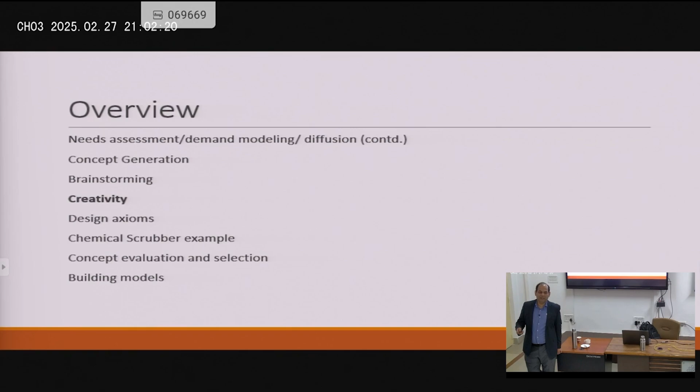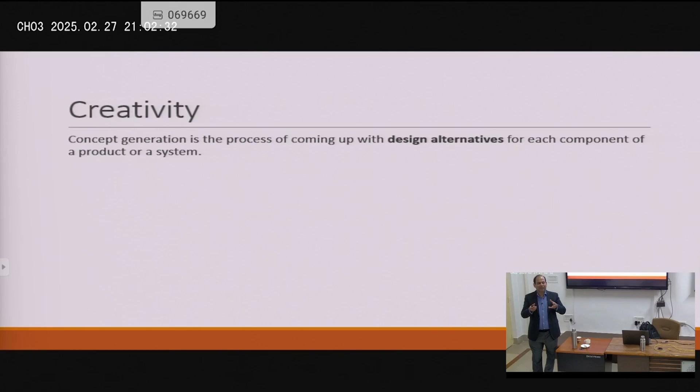So all of us have examples of creative design in engineering. I was giving the door latch or the doorknob assembly earlier. Creativity was going from a much more complex design to a simplistic design that works exactly the same. There's really no difference once it's assembled, except that design-wise, there's a lot of difference.

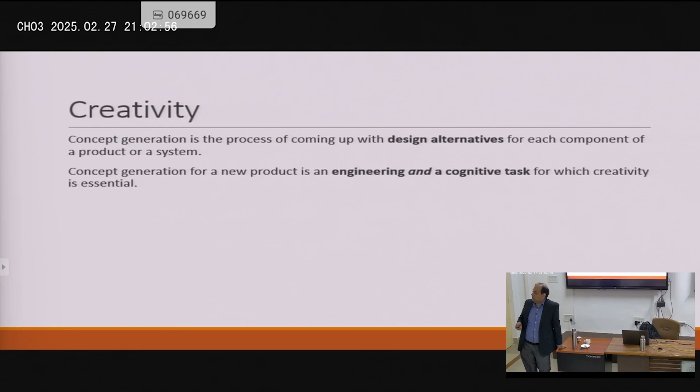So concept generation is coming up with design alternatives. Concept generation is a task where creativity becomes essential. It's an abstract concept, so it relates to the ability to come up with substantially new ideas or solutions. And we can actually effect fundamental changes in a product or a system if we are ready to be creative. So many solutions have gone from, I'm sure you've seen the evolution of some of the rocket engines over time, and then you see we simplify things, we come up with new solutions and so on and so forth.

So people will say some people are creative and some people are not. And we've found that creativity is not innate, it can be learned. So people can actually, over time, develop the ability to come up with creative solutions.

Anybody work with genetic algorithms here in optimization? So one of the ways, simplistically, even later in the lectures I'll talk about genetic algorithms in a little more detail, but one of the ways it works is it mixes and matches part solutions or solutions to sub-problems in many different ways. And when it does that, it's able to come up with new novel solutions itself, just like we do in nature. In reproduction, the genetics combine, and then we have newer and newer individuals that are over time evolved to have better and better traits.

So if you think of flying, that's a pretty complex activity that some animals and insects are able to do. If you go back to the evolutionary process, scientists say that flying has been invented by nature multiple different times using different pathways. It means that this solution can be found over and over again using this idea of mixing and matching.

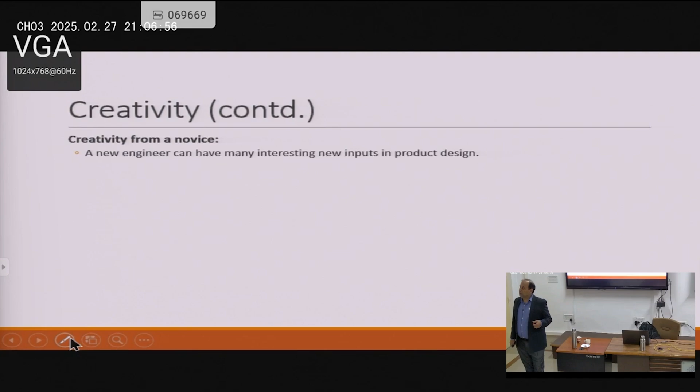So a new engineer has a lot of interesting new ideas. You come to an engineer in the field, a lot of you, if you go to industry, will see: oh, why don't they do it like this? Why don't they do it like that? Oh, I have an idea for doing this. And many times: oh, that doesn't work. Oh, that's dangerous. So those kinds of things can happen.

And it's a double-edged sword. So not having enough experience, everybody can still hear me right, sometimes helps you in coming up with new ideas because you're not constrained. You don't think about, you're not, so we say, jaded by your experience.

One example that comes to mind always when it comes to this is, I don't know if you've heard of the movie Citizen Kane.

Citizen Kane was a movie made in 1941, directed by Orson Welles. He was, if I remember correctly, 24 years old. That was his first movie. And even now, it's considered the best movie ever made.

When he was interviewed, they asked him, how were you able to make this movie that is considered one of the best movies ever made when you were 24? And he said ignorance. There's no confidence to match it. If you don't know much about something, there's nothing holding you back. You start questioning, and that's why he was able to do so many interesting things with the movie. Obviously, it's one of my favorite movies, so if you get a chance, definitely watch it.

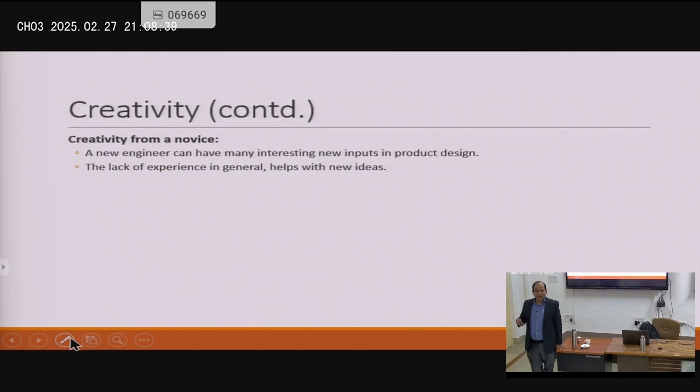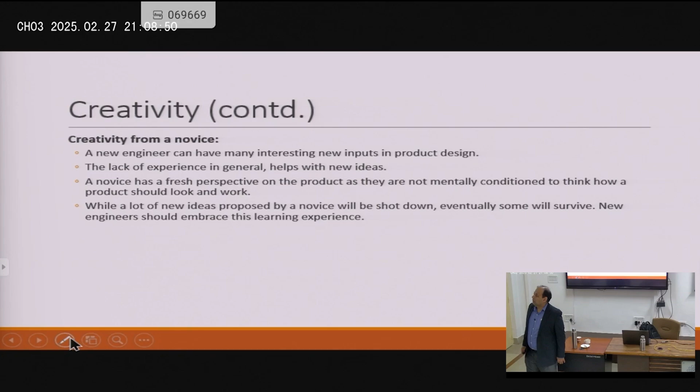So there's creativity from a novice, right? When it works, it's amazing. And when it doesn't work, of course it's disappointing, but we should take it as a learning experience. You should not think, okay, I had a bad idea, now what? You should say, okay, I'm expected to have bad ideas now because I don't understand the entire working of the system. And the more complex the system gets, the more of these ideas you will have, because even if you thought of the subsystem, you may not have thought of all the different interdependencies with different subsystems.

So you might make a change here thinking that I improve this subsystem, but I may have made something else worse, right? So there's an example, I won't get into much detail, where they were just changing a structural element in a plane, and they were able to reduce, either with new materials or new design, part of the plane.

They reduced the weight of it, right? And in aerospace, weight is everything. Every pound saves you 5 pounds, as they say, because reducing weight, you don't have to carry the fuel to carry that weight. Everything goes smooth after that. So you would think that anybody that can take a structural element and reduce the weight without compromising strength is a great thing.

Except it's not always a great thing, I should say, because in that particular case, the location of the center of mass or center of gravity of a plane should be in front of the aerodynamic center. That's not a trivial thing. You change it, now the flight control software, everything has to change. The entire plane starts acting differently. Going back to our 737 example, those are the kind of things that happen.

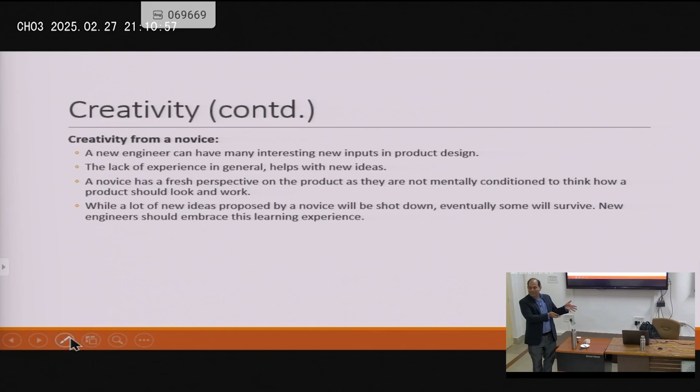Even if you made the plane lighter, you change the weight distribution, you change the location of the CG of the plane. Now the plane handles differently. Every control input that you have has to be modified based on the fact that the plane has different stability characteristics. So you would think, oh, I made this lighter and I made this better, but you caused system-level issues. There were other issues too, I think the natural frequencies and all those things changed, so it led to cascading system-level changes, which you wouldn't think, but you should embrace that idea.

So the idea is not to say, okay, we should not make planes lighter. That's not what we're saying. We should make planes lighter only when we understand the system enough, and involve the decision makers in other subsystems, so any change that you make can be accommodated. So if those people knew about the change you're making, they can change the flight control software, they can make other changes to the plane and go from there.

So new engineers should embrace this experience, don't get disheartened. But also be careful, don't start implementing ideas without telling people. So, oh, I made it cheaper, now I'm going to implement it - no, discuss it. Discussing with experienced colleagues is important.

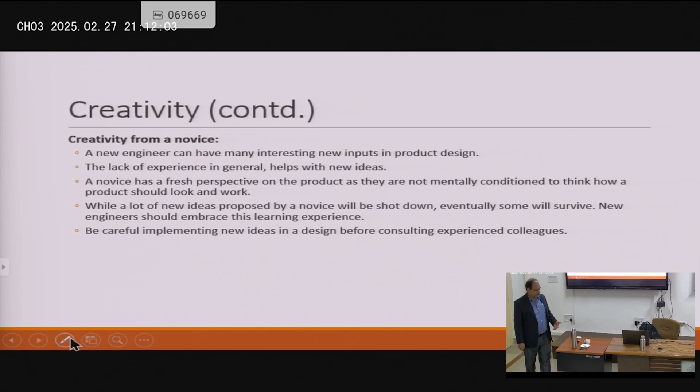Is there any correlation between creativity and design thinking? Well, design thinking is, creativity is a sub-part of that, right? So creativity helps you come up with better and improved designs. But again, we should embrace it, but I don't know if we can necessarily measure it. Creativity is an abstract concept that should be encouraged, thinking outside the box, as they say.

As a novice engineer, you should embrace the idea in your designs. And as an expert, that's the next point we have here - you have a different look to creativity because you're creating on top of your already good understanding of the design. So those creative steps have immediate benefits because they are already at the boundary of what's considered a good design, so any improvement you make quickly shows. In the case of a novice, their design thinking is let's change things and see what happens, versus we know that changing this in this way will make things better.

So like I said, experts are better at suggesting incremental changes. They can figure out that if you tweak this, it's going to get better. An example comes from...

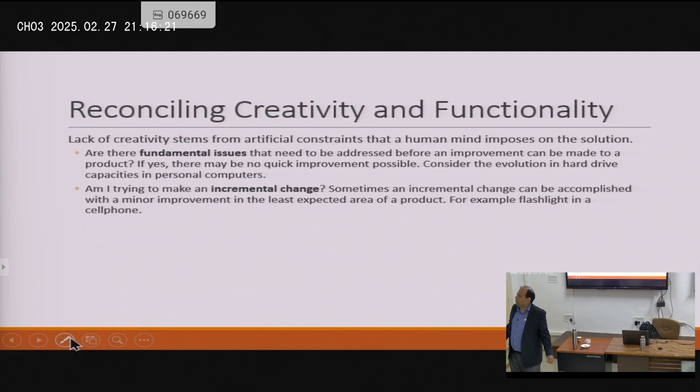If there are fundamental problems, then systematic solutions are the only ones that are going to work. For example, you could try an incremental change instead — you can improve a product, and there are millions of examples of this, where you think of improving it and ask, why don't we just do this?

Long time ago, people would use flashlights, the screen light, to see things in a dark room. So why don't we just add a flashlight, and then things were easier, right?

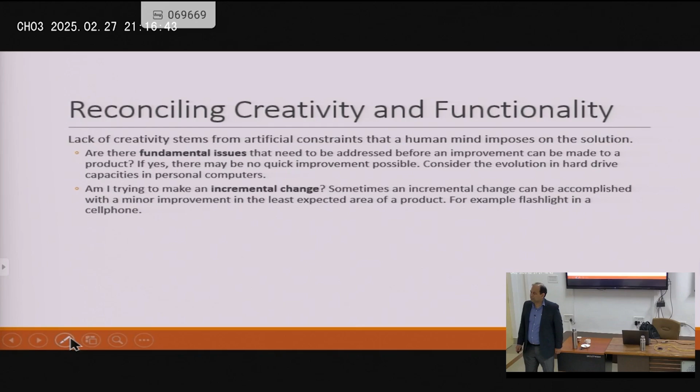Ask yourself if you understand the functioning of the product enough. Going back to our discussion of novice engineers not understanding the working of the system enough — in the scrubber example we'll cover later, I might think I can install a lighter motor here and it'll work.

Well, no, you don't quite understand — the objective is not just to pump water, but also to create enough pressure to accomplish a second task. If you don't understand the working of a product enough, you might run into these kinds of situations.

This was a real problem we had. We had space constraints, so we thought we'd just put a small motor there, but of course it wouldn't accomplish the purpose. Many times manufacturers would say don't repair your products, it'll void the warranty, because you might think you're making a change, but you're actually making it worse or more dangerous. So they say, don't repair products.

Many solutions are a result of somebody backtracking to the essential function. Sometimes we get anchored to a given architecture, a given product - this is the product we have, and we can change this. Go back to the original purpose. We have all these examples of slide rules versus calculators. The original purpose of the product was this. Why am I doing this? Let's think of a better way.

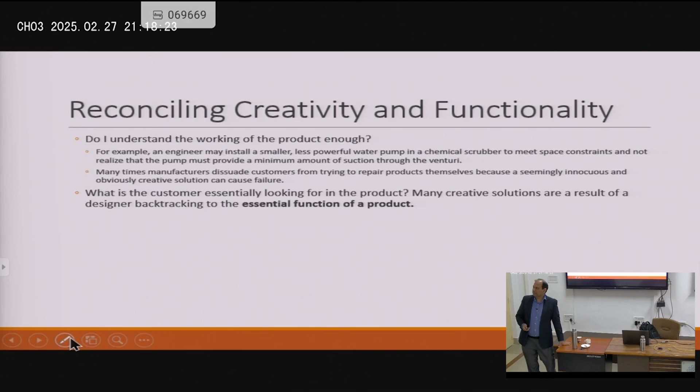A related thing from the whole genre of creative design and concept generation is axiomatic design. All of these are research areas in their own right - people have done a lot of work in these areas. I'm just trying to introduce you to some of these concepts that when you're doing concept generation, conceptual design, you should think about. These are guiding principles that you can use.

So we talk about creativity - it's a guiding principle. We cannot really come up with a theory, a mathematical theory of creativity. That's not going to happen anytime soon anyway. So another thing is axiomatic design, right?

So each product and each design is different. If each product and each design is different, then what similarities exist? We can never study product design, we can never study systems design, right? So if we go back to our first lecture, I kept saying: develop domain independent skills, skills that are domain independent that you can apply to the design of a water bottle. You can apply it to the design of a personal computer.

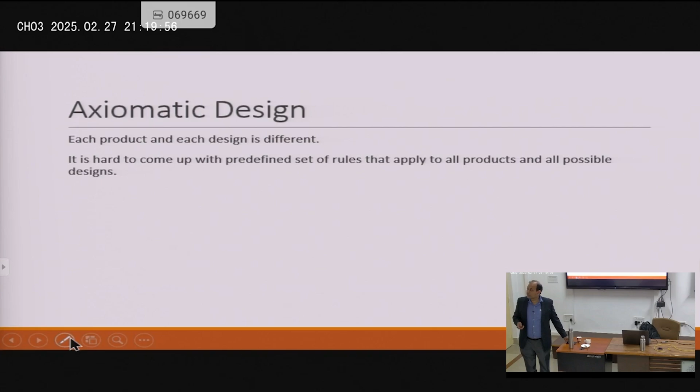And that's what domain independent knowledge is, and that's where this whole idea of axiomatic design falls. Like I said, it's not something we can have a mathematical theory for, but definitely it serves as a guiding principle. So the first one is: maintain the independence of functional requirements. Functional requirements should generally be addressed independently of each other, and minimize the information content of the design. Information content of a design roughly translates into how much information is required to completely manufacture a product, and this should be minimized.

Can one of you try to elaborate on these? First one, maintain the independence of functional requirements. Remember when we talk about customer needs being addressed by functional requirements from the product - functional requirements are features of the product or system that help us address customer needs. This one's saying keep them independent. So each functional need should be addressed by a different functional requirement - we're not talking about customer needs, those are already mapped to functional requirements. We're talking about functional requirements themselves: one functional requirement should be addressed as much as possible independently of the other functional requirement.

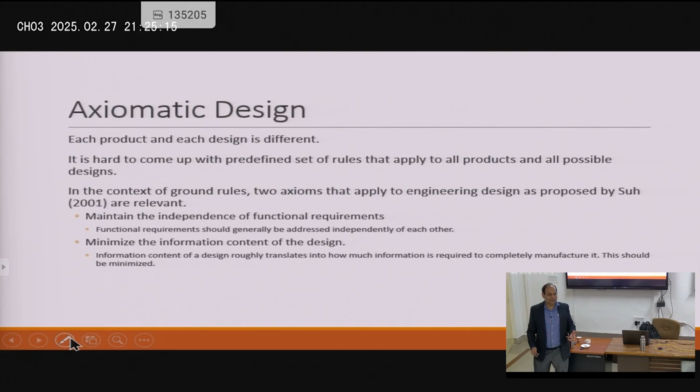Another example to further exacerbate the violation of this rule would be space. Those are one-off things, right? You try to integrate as many things as possible because you can spend millions of dollars making it more reliable, and then you don't have your weight constraints.

Would you give a few examples in which it maintains the independence of functional requirements? A personal computer. Right, so basically you have a power supply. You can take out the power supply from this company, add another power supply. You take the motherboard out, leave everything intact, make the connections with the other motherboard, it'll work. Take the hard drive, add a different hard drive. People do it all the time, right? So it's a modular product. The storage is completely independently done from the power supply, which is completely independently done from this.

We strive for it. In certain domains, we cannot do it, or we shouldn't do it, which is aerospace, a striking example of that.

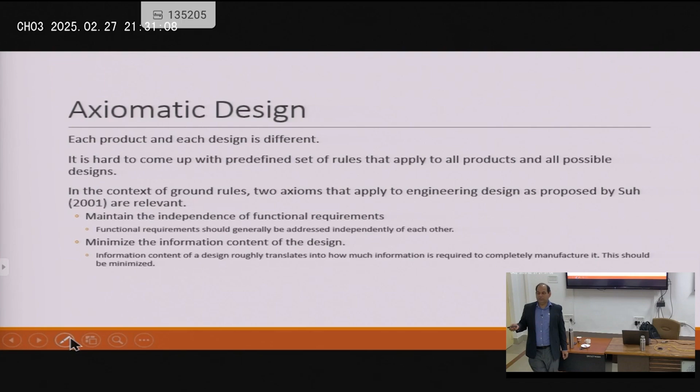So earlier I said minor weight changes the CG, bad things happen. Here, plane has 200 tons, a plane that cannot land because most planes are too heavy - their weight saving is everything. So their landing gear and structurally they're not strong enough to land. They have to first burn the fuel, get light, and they can land. Or if they land right away because of an emergency, they throw away the fuel to get lighter so they can land.

But the fuel is distributed such that as it burns, it does not change, or changes predictably, the CG of the plane. Most of it is in the wings and all that. So you make sure those things don't happen. Even in that case, you minimized the system effects by making it independent of that. So sometimes it takes some extra engineering, but it can happen.

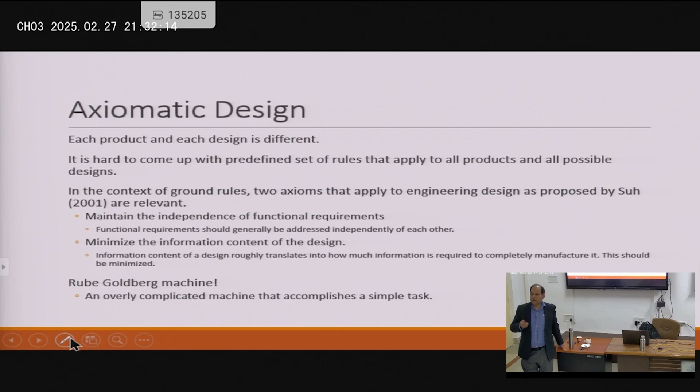And the next one is minimize the information content of a design. That should be pretty obvious. But have you seen or heard about the Rube Goldberg machine? Somebody is sitting down to eat breakfast, and they press a button, and then the ball rolls down and hits something else, which triggers something else, and then opens the valve, and then that starts the stove, and something starts cooking, and then the robot picks it up and slides it. Really complex way of doing something very simple, right? I'm sure you've seen those ads and things like that.

So the idea there is that's the opposite of what we should be doing in engineering. We should be making designs as simple as possible in terms of information content. People will say that you can do it, but for a general product, you really cannot come up with a hard and fast rule, but you should say keep it simple. Occam's razor - keep it simple, minimize number of parts, minimize number of things.

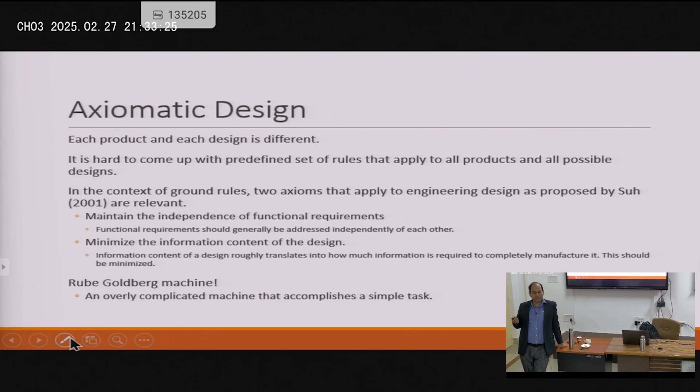In my systems engineering class, when I teach it full semester, I also teach design for manufacture. If you read any of the books by Boothroyd on design for manufacture, he says minimize part count, minimize part count. He talks all the time about minimize part count. For example, he'll say, okay, I have two things that need to be joined - screws, I join it with screws. He says, okay, how about plastic snaps? Just snap it into place. Guess what - if I don't have a part, if I can eliminate parts, I don't have to make it.

I don't have to order it. I don't have to receive it. I don't have to store it. Nothing has to be done if a part does not exist. So minimize information content is generalizing that concept of reducing part count. It's keep it simple, don't have weird shapes. Like somebody says, okay, how about this nice curve? But who's going to manufacture it? It increases manufacturing costs.

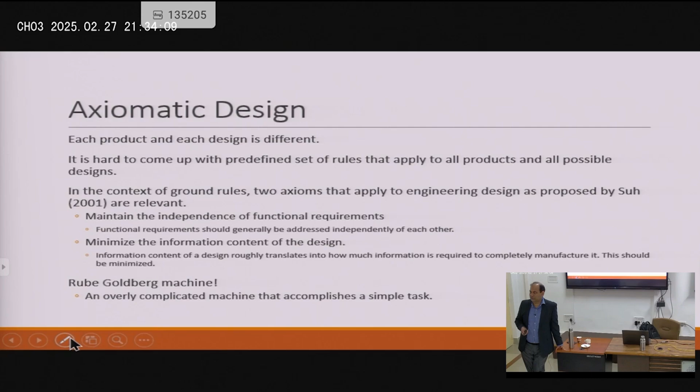I had the whole slide on that, but either way, we've talked about these points: functional requirements address intent and behavior during operation, and many functional requirements are possible.

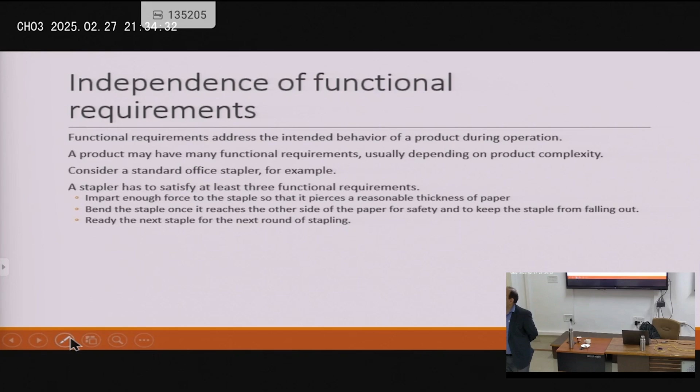So here's an example of the independence of functional requirements. We've talked about it enough, and I think we had a more fruitful conversation here in the slide.

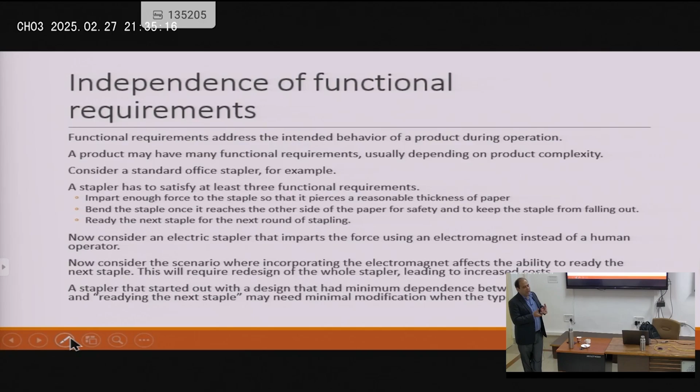Let's say you have a stapler with these functional requirements: impart enough force, bend the staple once it reaches the other side, and ready the next staple for the next round of stapling. If we incorporate the electromagnet, the ability to ready the next staple is affected. Now you have dependence, right? One affects the other, and that's generally a bad thing. So minimize the information content, the number of parts, okay?

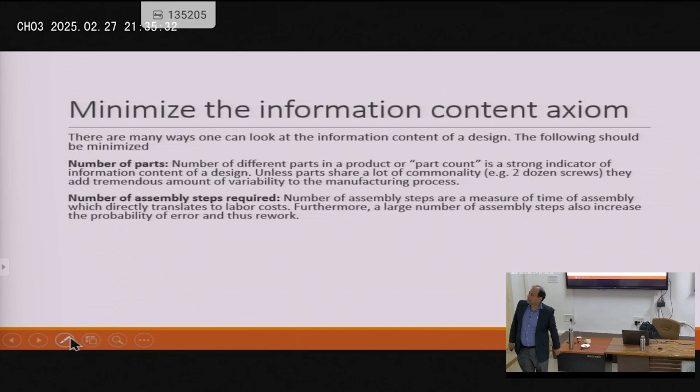If you can reduce or eliminate a part, that's always good. Number of assembly steps required: if you have a lot of assembly steps, it will take time, you need training of personnel, you need to do it in the right order, and you can make mistakes. There's a course I teach in design for manufacture where some examples are ridiculous. Boothroyd gives an example of an electrical assembly where they saved time in assembly by a factor of 50 because they reduced parts, simplified things, and used standard connectors. Imagine soldering everything together versus just a snap connector to connect fifty things.

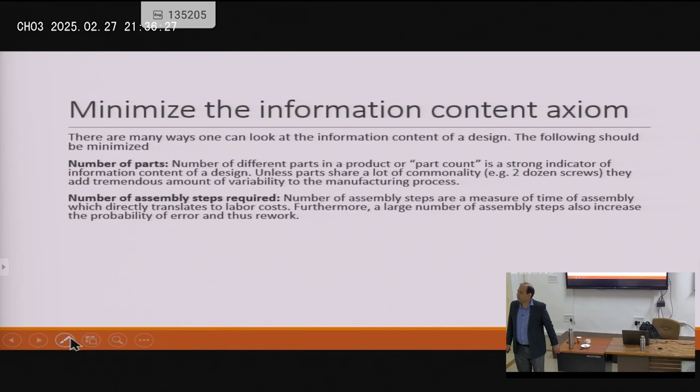And so on and so forth. Number of different material types—that's been considered a challenge not only in manufacturing, but in disassembly, reuse, and recycling as well. If you're using different material types, somebody has to source them and process them in a certain way. How about we combine them into one? How about we use the same material for everything, or something that's benign? So sometimes it evens out.

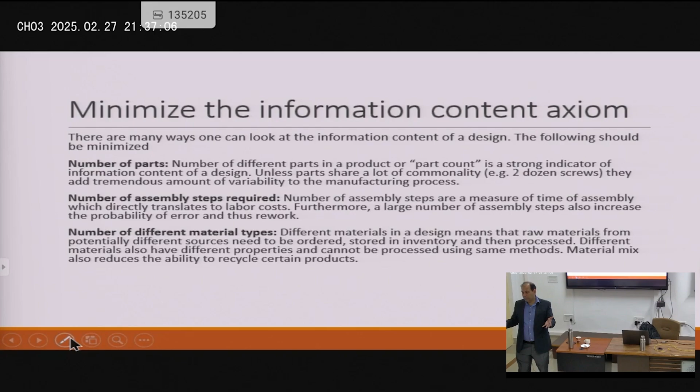You'd say, okay, I need this material for this because it's corrosion resistant, but I need that material for that because it's structurally better. Or I have a third material that's more expensive but can do both. Sometimes it's better to have something more expensive that can do both, because now you've simplified things, right?

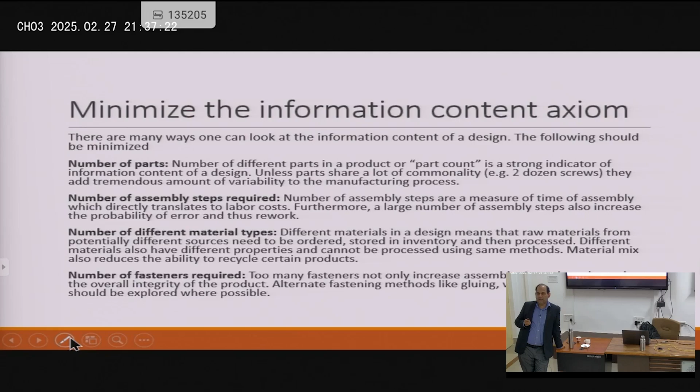Number of fasteners required—these are just examples of what you should think about regarding information content. If you have too many fasteners, that's a problem. If you have too many parts, that's a problem. If you have too many assembly steps, that's a problem. Average assembly time, number of machining operations, number of different dimensions used.

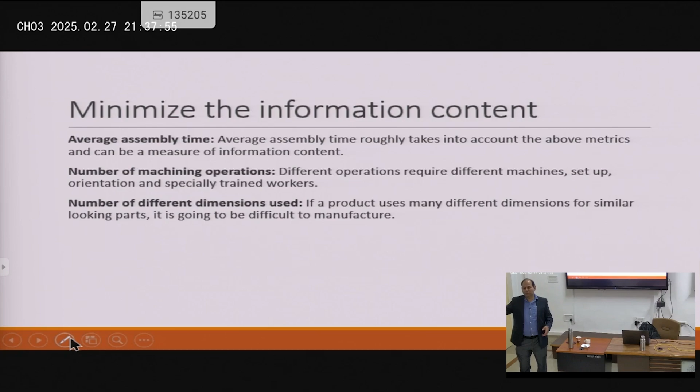So let's talk about part standardization. In a design, you standardize things, right? Once you get down to the subsystem component level, you'll see the same parts repeated. Look at the circuitry, controllers, and relays in an aircraft—pretty much standardized parts. You order part number so-and-so from a company, and you order 30 of those.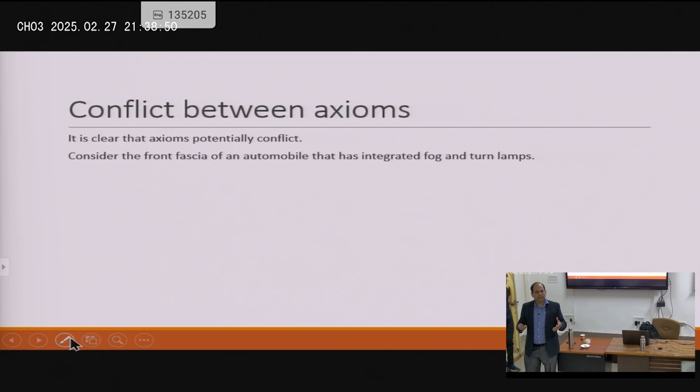You do it, and then you figure out what can happen. So let's say after 10 years, you realize your repair and maintenance steps are too complicated. Then you think, okay, maybe we should separate these because it didn't work out.

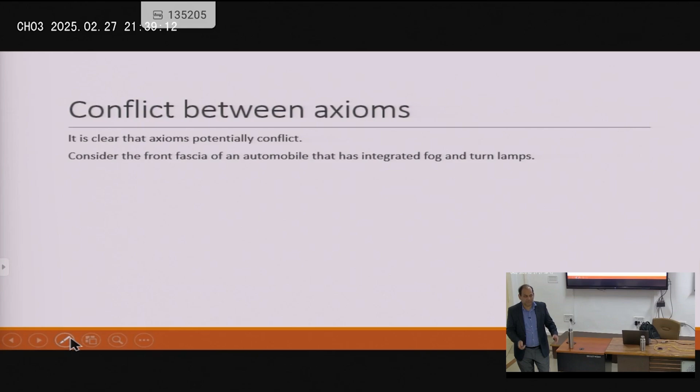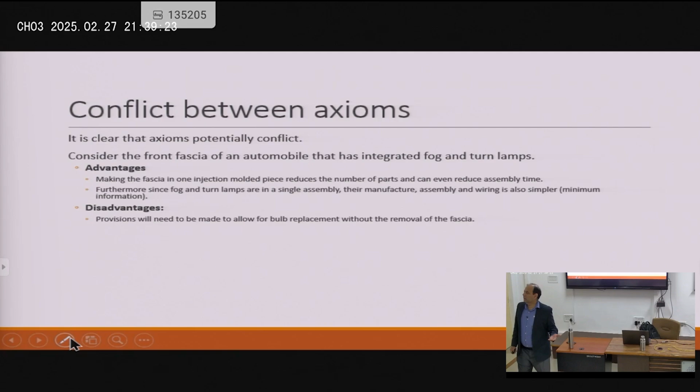So an example I gave is the front fascia of an automobile, where you have integrated fog and turn lamps—one lamp has the fog lamp and turn lamp together. Well, if one breaks, you have to change the other one too. It affects the other ones, right? So you can make it simple, but repair causes issues, right?

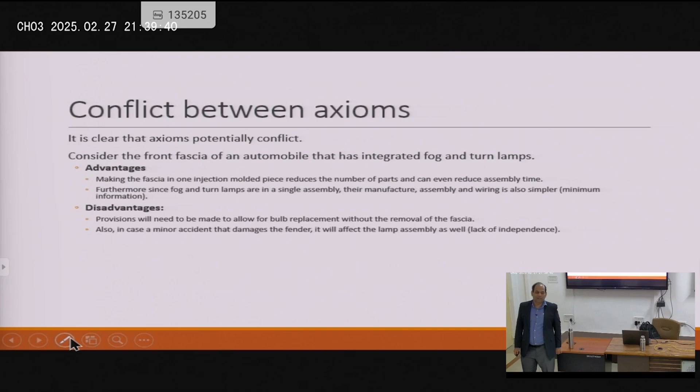In case of a minor accident, let's say something that damages one light, now you have to change the entire assembly because it's just one single assembly. It was easier to make, but now you've paid the price in the cost of repair and manufacture or replacement. So independence of functional requirements can and does interfere with the minimum information content axiom.

There is no way around it. I think you should also study TRIZ, theory of inventive problem solving. TRIZ was a method proposed by a Russian scientist who said that once you start improving designs, eventually you start seeing conflicts. If I do this, that happens. If I don't do it, this happens - two different things conflicting. He said that most engineering design problems can be categorized into 40 different problem types. In TRIZ, you convert a problem to one of the TRIZ problem types, find a solution, and then convert it back to your problem.

When you use a solution method like that, you will start seeing why, if you want to improve a certain design, you can create independence, or you can actually get rid of independence and come up with a better design. So TRIZ is something you should definitely study.

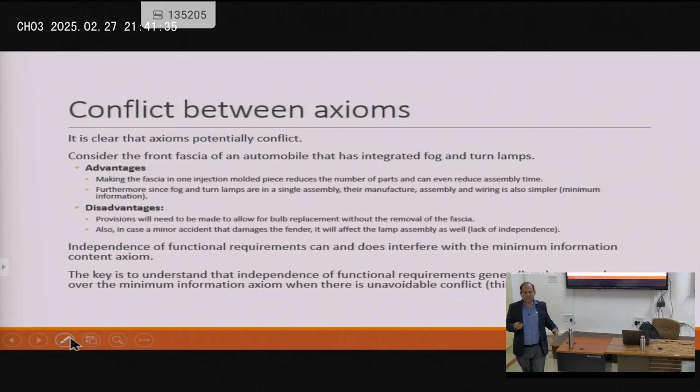Like I said, these two axioms conflict more often than not. Again, there cannot be a hard and fast rule, but more often than not, my view is independence of functional requirements supersedes minimizing the informational content of the product. So you can try to minimize functional requirements, minimize the dependence of functional requirements, or maintain independence of functional requirements, and of all those designs, minimize the information content.

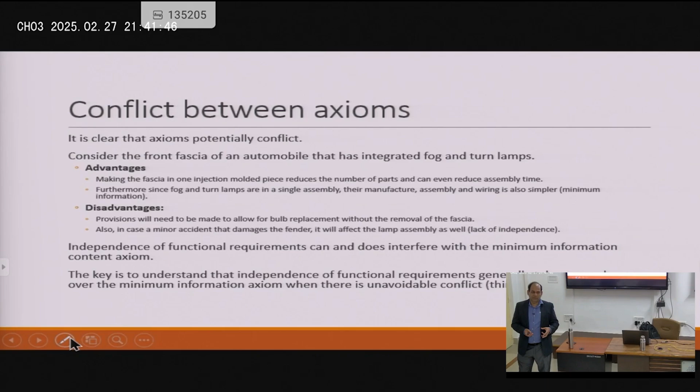That's that. The next one is just a quick run through of what we have already done, and then we'll go from there.

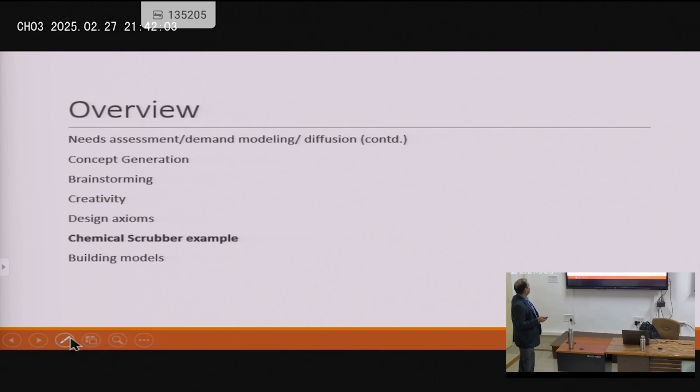So, a chemical scrubber example. Do you know what a chemical scrubber is? Think of chemical labs where you do experiments and release certain chemicals or gases. You cannot just release it into the environment - they have to be turned benign before you can release them. So, do a lecture if you want, but we took a break, right? If you want, you can stop at 7:20 or whatever.

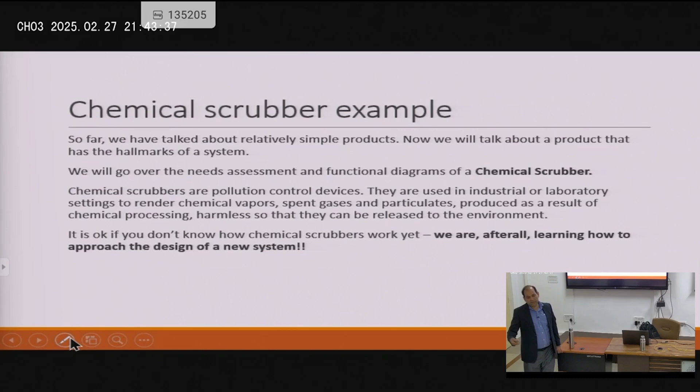Basically these are systems that render harmful chemicals harmless. Like catalytic converters, but these are specific ones used in large installations. There's pyrolyzing ones that force the chemicals to react with other chemicals so they become inert. Sometimes you just run them through water and that scrubs the material. These are pollution control devices - they take chemical vapor, spent gases, particulates, and render them harmless. It's okay if you don't know what a chemical scrubber is - the idea is to learn how to make something new.

So, needs statement. Consider a company that has just received an order from a customer to manufacture a chemical scrubber. The customer is located in India - imagine you're in the US right now. It requires the scrubber to only treat relatively harmless gases which only need to be washed with water. The customer cannot guarantee that - this is verbatim, like somebody sends an email to you, intentionally written in a conversational but less technical way. The customer cannot guarantee continuous water supply for the scrubber, but does guarantee uninterrupted power supply.

The amount of gases to be scrubbed is significant, and the experiments do not impart any pressure to the gases, so the scrubber should be able to create suction. The customer also wants the scrubber to provide visual or audible signal in case of a malfunction. In addition, the customer provides a layout of the lab where the scrubber will be used, along with gases to be scrubbed. So you have to parse this into needs statements - they will send a paragraph like this, and one little comma, one little phrase could have huge implications.

So if they say they cannot guarantee continuous water supply - well, you need water for the scrubber to work. But yes, the concentration of chemicals will go up. So maybe you can store fresh water in the scrubber. A lot of these things are interrelated.

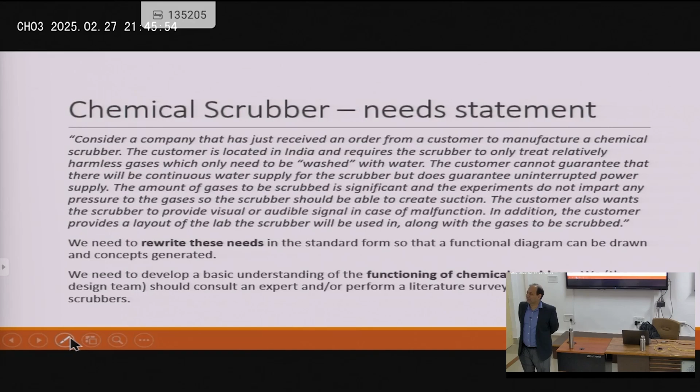Talk to the expert in your group, hire consultants, or perform a literature survey of existing chemical scrubbers. How do other people do it? Some of these designs have been existing for 50, 60, 70 years.

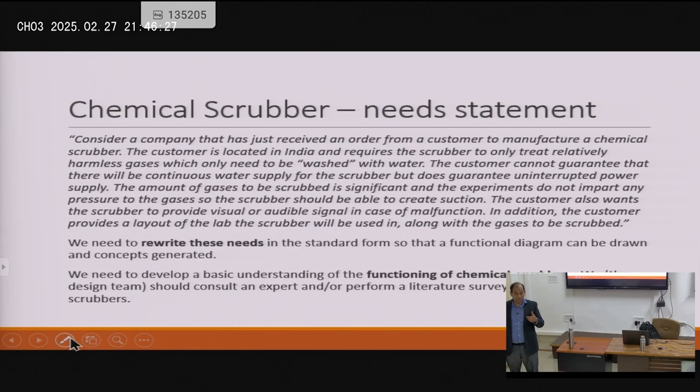And then it said that the customer provides a layout of the lab along with the gases to be scrubbed. So they provide what sort of chemicals they're going to release, and now you can plan accordingly. This much chemical, so I need this much flow rate. Or you can actually tell the customer a simple scrubbing with water will not work in this case. So we just try to parse what the customer said.

Since the location is in India, the scrubber's electrical system should be able to handle 220 volt power supply at 50 hertz. In the US, it's 110 volts at 60 hertz. So this actually was the problem we were working on. The first thing you have to say is that everything you buy, either put a transformer in there to go from 110 to 220, or every single electrical component in the scrubber has to be able to handle 220 volts.

You don't do that and bad things happen. Another thing is that you also have to think about efficiencies, because motors that run at 60 hertz or are designed for 60 hertz will run at a lower efficiency when you give them 50 hertz. So all those things have to be thought of. You cannot ignore it.

Generally what you would do is that when you order the individual parts, you always look for voltages and frequencies. Can it handle 50 and 60? Some 60 hertz components will not work at all, or they're not designed to work on 50 hertz. So those things have to be thought of.

The scrubber needs to be able to generate suction. So then you have to do some analysis. Like, they said the layout of the lab is this, this is how far the experiments are going on. The experiments don't impart any force, so you have to generate suction, some negative pressure, so that you can actually pull those gases towards the scrubber.

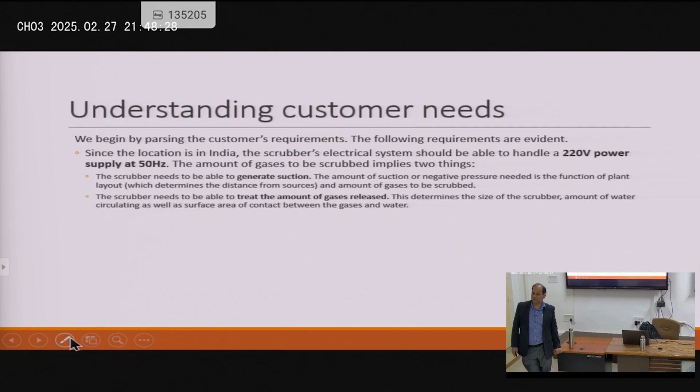And then obviously it needs to be able to treat the amount of gases released. You say, okay, well, they say we're going to be running 6 experiments simultaneously. And then you do the calculation and go, oh, we need to have a big scrubber, or 2 scrubbers, or something like that. And so on and so forth.

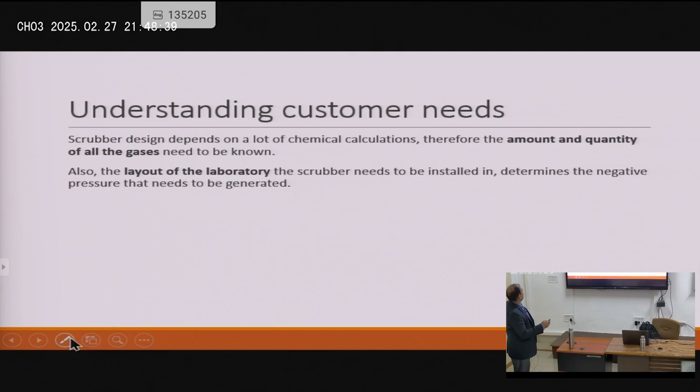So the amount and quantity needs to be known, layout of the lab needs to be known. We assume 5 inches of water column, and don't ask me why pressure is used in inches of water column, but pressure can sometimes be measured that way. So atmospheric pressure is how much water column?

Anybody know? 760 mm of mercury, 10 and change meters of water. So basically you can say, okay, that's just a unit they're using. You could work just as easily with pascals, or PSI, or whatever you want to use. That's not critical here. But whatever pressure needs to be generated so that, given the lab layout, you'll be able to pull those gases to the scrubber, that's what matters.

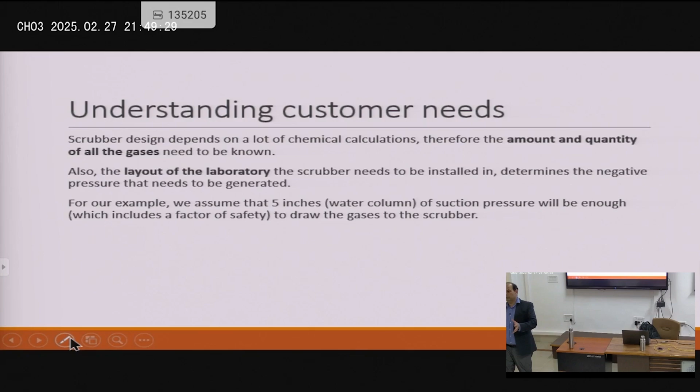And then a packed tower would be used to scrub the amount of gases encountered. So think of it this way: you have essentially a vertical tube where you've put a lot of plastic balls, basically trying to increase the surface area. So you flow all the gases from the bottom, and from the top you spray water, and the water trickles down, and then it has a lot of surface area to interact with the gases, and it scrubs it.

Again, I'm not a chemical engineer. I'm not talking from a scientific standpoint, I'm talking from a systems engineering standpoint. Like, if you were to design something like this, what would you do? You might consult a handbook of these things to make it.

But as an engineer, as a systems engineer, your work is not done just because you figured this out. Putting it all together is our job, right? How to make something like this that works as an integrated unit.

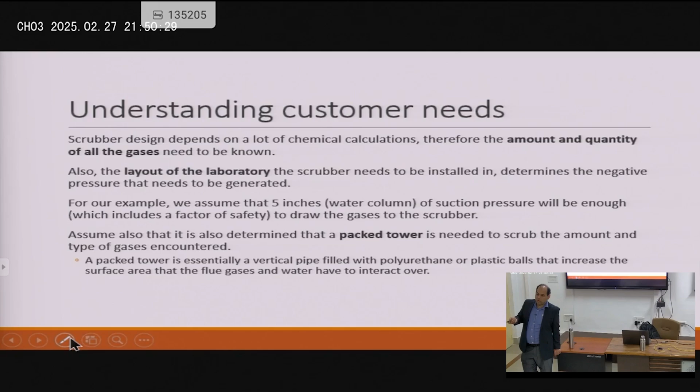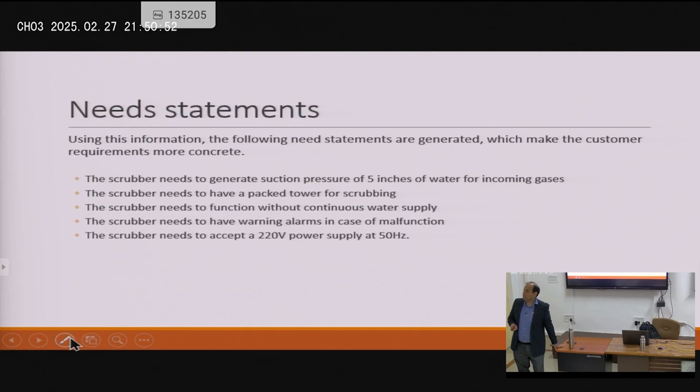So, need statements. That's pretty straightforward. The scrubber needs to generate suction pressure of 5 inches of water column. Needs to have packed towers for scrubbing. Needs to function without continuous water supply. Needs to have warning alarms in case of a malfunction. And needs to accept 220 volt power supply at 50 hertz.

You can draw your house of quality. I'm going to leave it to you to do this. And this is not an exhaustive list. You can probably come up with more needs that I did not write down.

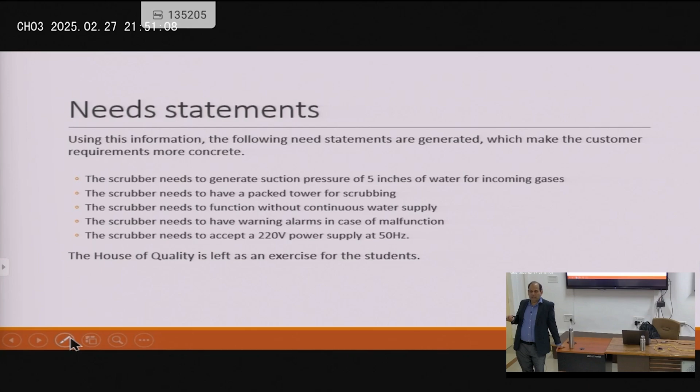Okay, so the functional diagram is like this. You accept electrical energy, so that's the dashed lines. Accept electrical energy at 220 volt 50 hertz. Convert energy to kinetic energy of water and to create suction.

So since you have to create suction, you need to use power to do that. You need to move water, you need power for that. Okay, so think of it this way: you accept flue gases and accept water.

So when you create the suction, you're able to accept the flue gases. You measure the suction pressure, because if the suction pressure is not high enough, then maybe there will be backflow, and that's dangerous, right? Because we're talking about harmful chemicals.

So then you run the water through flue gases and reject inert gases and water. Okay, so you rejected it. Accept water, store water until need to replace, because the customer said they cannot guarantee continuous water supply.

So you store water, and then you measure water pH and measure water level. So you have to have enough in the tank that you can run the system, and then you have to have another tank, or you can have this - you can run the same water through the tank.

But as the concentration builds up, maybe the pH of the water changes, so you have to have a sensor. So whenever water level goes below a certain level, because of evaporation or something like that, or when you're rejecting it, whenever water pH goes above or below a certain number - whatever you decide is safe - and whenever the suction pressure goes below a certain amount, you sense malfunction and you set off alarm.

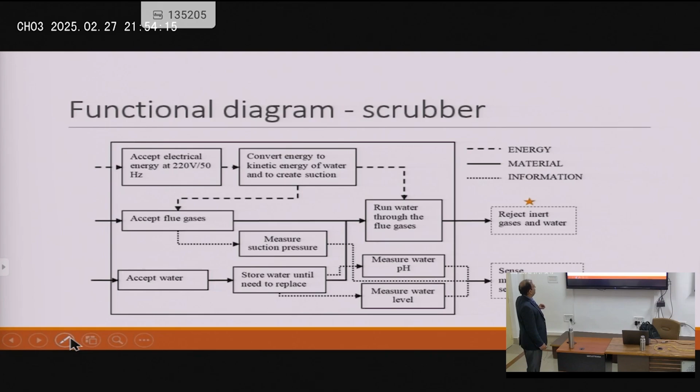Oh, so basically, I went through this anyway. Measure suction pressure, measure water pH, measure water level, and then reject inert water, sense malfunction, and set off alarm. So this is just the steps.

So concept generation - let's say accept electrical energy at 220 volts at 50 hertz. Okay, that's trivial, but needs to be done. Things will break. When my wife took some of our electrical stuff to Europe, that's also 220 volts, at least similar, and some of those things did not do so well. Right, so pretty straightforward: make sure that all the components within the scrubber's electrical system are compatible with it.

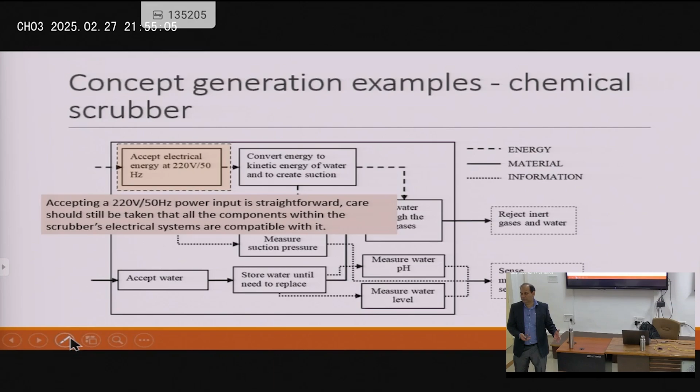You could also make the decision that I'll have a transformer and use all the standard US components that work with 110 volts. That's one solution you could come up with, but now you're talking about space. Or you could just buy different components - up to you.

Convert energy to kinetic energy of water and to create suction - how will you do that? Some blades. So you need to have some pumps, you're saying. Right? Pumps. What kind of pump?

Water has to move and air has to move, right? Because you have to somehow create suction for the flue gases, and you have to also pump water from the tank, wherever you're storing it, to all around, so you can spray it through the flue gases. So 2 pumps, okay? 1 pump for air, 1 for water.

So let's see, we use a water pump, let's say. First we have to use a water pump to move the water from the tank to wherever it needs to be sprayed. You can use a centrifugal pump, a vane pump, a peristaltic pump. You can use all sorts of pumps. Some of these are bad ideas, but in the beginning you don't think of it as bad or good ideas, you just do it.

And then evaporate - another one could be, we can evaporate water by heating and let steam flow through the flue gases. You can do crazy things. This is a brainstorming type session.

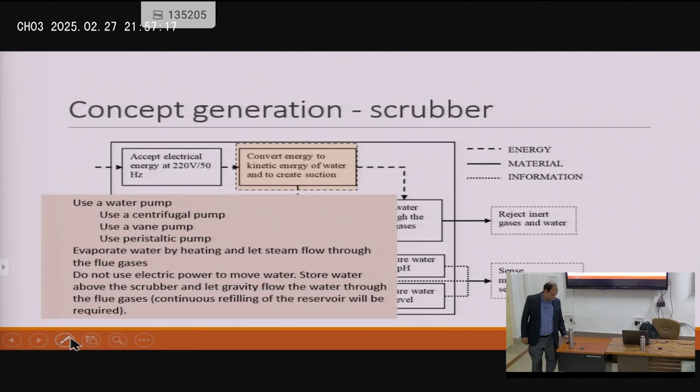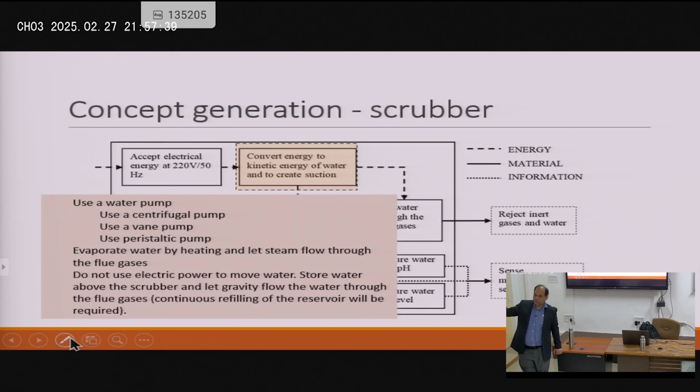Well, first and foremost, if you have a finite amount of water, it will eventually run out. The customer said they cannot guarantee we'll have water all the time. So that's a bad idea given the constraints we have from the customer. We need to be able to, once it falls, reuse it with a pump. No matter how you do it, you need some way of moving water, okay? So that's a bad idea.

How do you accept flue gases? So I give you a huge pipe. On the other end, chemical experiments are going on that release fumes. How will you accept it here? You'd have some sort of pump, right?

So first you assume that it's going to happen anyway. Sometimes people do that - that's a bad idea because the customer said clearly that they don't impart any force over there. You have to create suction. Use an air pump, you can use that. What can go wrong there?

Well, one of the things we talked about is that these are chemical experiments, right? You don't know what's coming out the other end. Either you buy a pump that can tolerate toxic or corrosive chemicals - in fact, there's ratings for those, like all pumps, you can buy those things. Those are an arm and a leg, very expensive. But you can say, I want something that can handle acidic fumes or something like that, and then you can buy a pump like that. But then that is a challenge - things will get damaged very quickly if you're working with corrosive things.

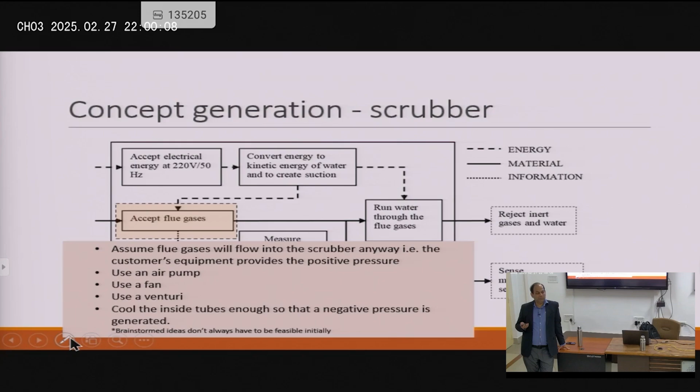So, okay, so then convert energy to kinetic energy of water and to create suction to accept flue gases. I can maybe combine these two things into one, right? So going against my functional requirements thing, but you'll see how magically things get better. What about using a water pump with a venturi?

So now I look like I'm violating the independence of functional requirements. But the benefit I'm getting is immense, right? So this is a cross section of a venturi.

I take high pressure water from the pump and I spray it in a nozzle like that, right? If you spray it with a high enough velocity, it creates enough suction that on the left hand side, the flue will automatically be pulled in. You can do this experiment - I build these things with my own hands. You can create some serious suction that way. And the location of the nozzle, if you move it higher or lower, you can change the pressure generated.

Now think about this, right? If I'm just spraying water, I don't have to have a pump for the flue, with all those parts and electrical connections. So I minimize the information content. I have no moving parts in here, it's just a basic thing that sits there.

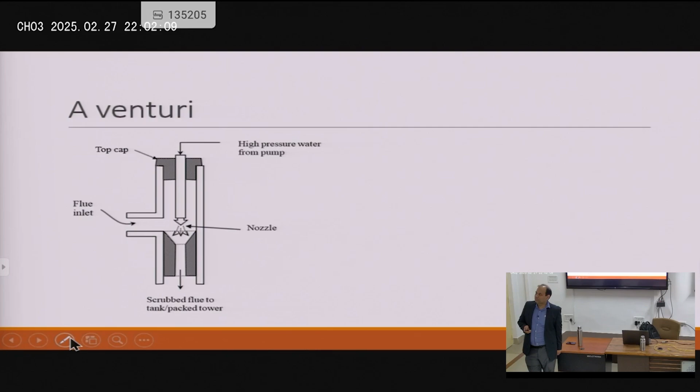And all I need is a water pump. I don't even need an air pump for this, right? So we can make it out of PVC because it's relatively inert to chemicals. We spray water through this, and then there's a decreased cross-sectional area.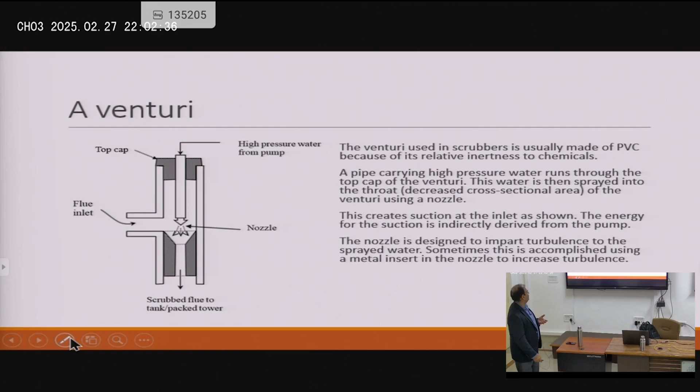So the energy for the suction is indirectly supplied by the water pump, right? You're stealing some energy from there, and you're also performing some scrubbing here. It however increases the required power rating of the water pump. Earlier you could just get a tiny little water pump, all it has to do is spray water, collect it, spray water.

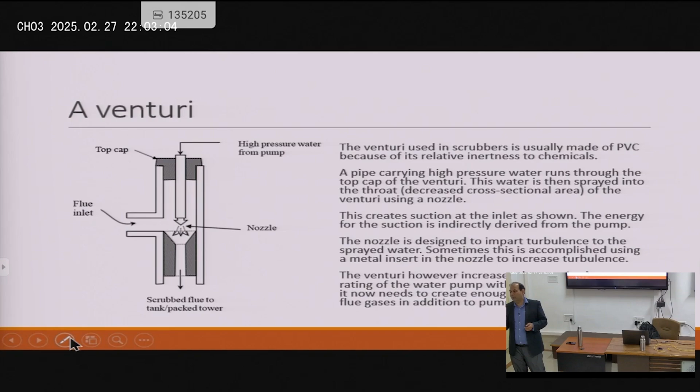Now you have to inject it through a small hole in the nozzle with high enough velocity that it can suck flue gases in, right? So now your design requirements change, there was a dependence as you'd talk about. So that is solved for now.

Run water through flue gases. You can do a lot of things here. You could have pipes and spray water. Well, the customer essentially asks for a packed tower. This is a common thing - they'll say, no, we want that, we don't want to compromise on that. So that's okay, well then that's what we'll give you, right?

We need to determine the size and type of packing. How thick should the tower be? What sort of things should be inside so that it increases the surface area? We use plastic balls sometimes, and they also work better when there are particulates present.

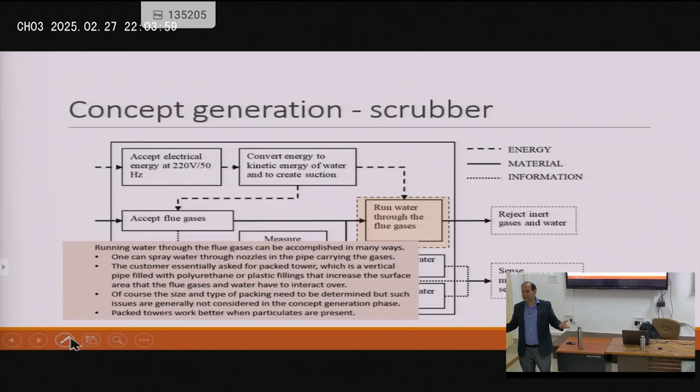So maybe the customer thinks that there may be particulates in the air, right? That's why they said that. And this is pretty standard - measure pressure with off-the-shelf fittings and sensors, you can buy these fittings online. Standard connections, PVC connections that you have at home, measure water pH, measure water. All this is pretty standard stuff that you can buy online. There's really nothing special there, but you need to know where to get them and how to install them.

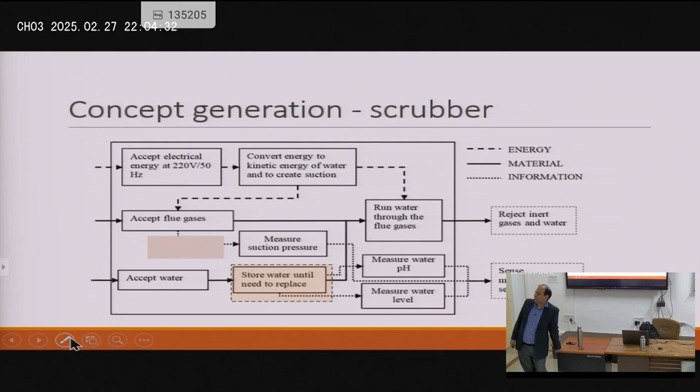Store water until there's a need to replace it - where do you store water? In a tank, right? So, water tank. Okay, so this is the standard setup for the Venturi scrubber.

Over time, water level might change, water pH might change, and when something goes wrong it senses it and sets up an alarm. Every once in a while you drain the water and replace it with fresh water, or when there's an alarm you replace it with fresh water. An engineering student, if you have all the parts available, could probably assemble the whole thing in a day. So it was pretty straightforward. We made complex ones too, but this is a pretty standard one.

But again, this is more or less like a system - you got to see conceptual design, how to come up with solutions, how to think about minimizing information content, maximizing independence of functional requirements, and so on. So come up with something that you can actually sell. These things are very much in demand, and now you know how to make them.